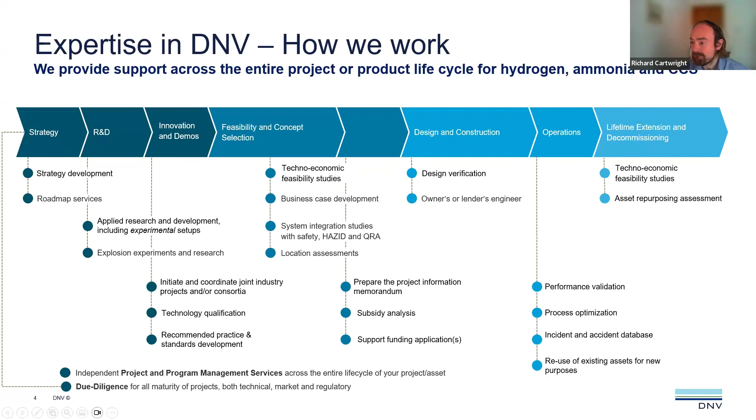So we've used the expertise that we've got in our team and also in DNV as a wider entity to develop, over 6 months during 2023, a guidance document for green hydrogen production. This was done on behalf of and in collaboration with the Energy Institute's Power Systems Committee. The main aim of the document is designed to give clear and practical guidance to industry on the key aspects of green hydrogen production, and it should be available from April this year.

The study includes quite a few things, and we'll focus on a few of them in more detail during the course of the discussion today. It includes design considerations, electrolyzer types, operation and maintenance considerations, and things surrounding co-location - so that's either locating it with a renewable power source or with a hydrogen consumer. The document also discusses the regulatory landscape for green hydrogen and how government support is developing for the industry as a whole. With that, I'll pass on to Gwen to discuss current definitions for green hydrogen.

Yeah, okay. So green hydrogen definitions - green hydrogen broadly refers to hydrogen produced from renewable energy sources, and it represents a rapidly expanding market. This brings a diversity of technologies and ultimately a greater divergence into what can be considered green. So it's therefore important to establish common principles around low carbon hydrogen to provide greater confidence and transparency. I'll first run through some of these key definitions.

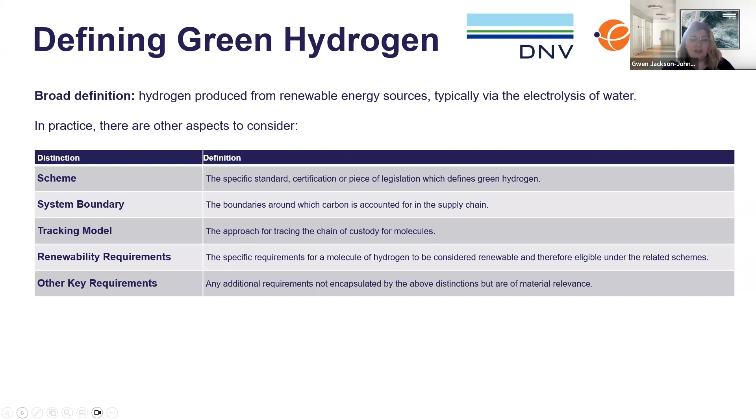And lastly, the renewability requirements. These are used to determine the credentials of green hydrogen. Most schemes consider the renewability of electricity generated prior to the hydrogen production, and some require geographical or temporal correlation of the electricity generation relative to the produced hydrogen. Some schemes also consider whether the electricity consumed in the hydrogen production process is believed to be additional - this is called additionality, and it loosely refers to the principle that green hydrogen is produced using new renewable energy capacity, although there are variations between schemes. There are other requirements too, not encapsulated in the distinctions above, which might include the encouragement of wider social benefits and other considerations such as water use and land use.

Okay, next slide, please.

So in RED II, the requirements are either direct connection to the renewable power with an additionality requirement - this additionality requirement is that the renewable electricity plant must have been put into operation no earlier than 36 months before the electrolyzer. Or, if it's grid connected, there are two approaches. The first is that the electrolyzer must be in a bidding zone with 90% renewables in the previous year, which essentially ensures that the electrolyzer is drawing power from the green grid. The other approach is that additionality, temporal and geographical correlations are required - meaning, as mentioned, the renewable electricity plant must have been put into operation no earlier than 36 months before the electrolyzer.

To meet the temporal correlation, the generation should take place within the same month. However, from 2030, the idea would be that this would move to hydrogen being generated within the same hour as the renewable electricity. To meet the geographical requirements, the renewable electricity plant and the electrolyser must be located in the same or an adjacent bidding zone. The bidding zone is the largest geographical area within which market participants can exchange energy without capacity allocation.

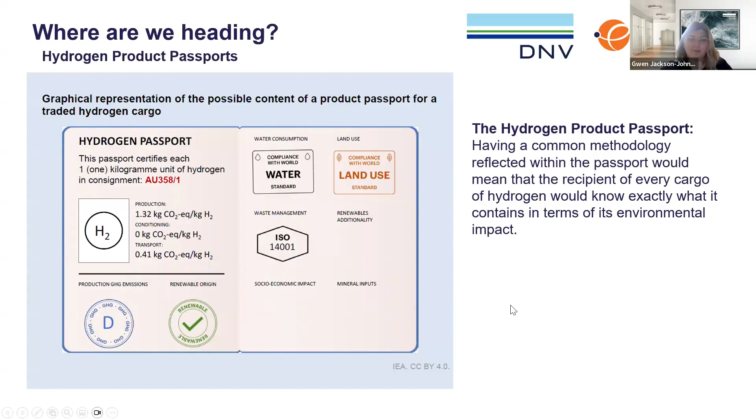Back over to me. So Gwen has defined green hydrogen, but how do we actually produce it? The first means to discuss is biomass gasification. It's a very well understood, mature process now, albeit complex, but it's essentially the thermochemical breakdown of carbonaceous materials into syngas, which is carbon monoxide, carbon dioxide, and hydrogen predominantly.

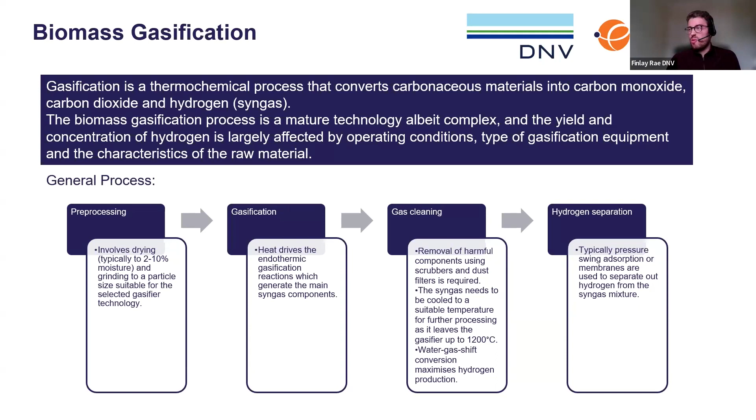It's a four-part process, generally speaking. Pre-processing involves drying the biomass and macerating it down to the right particle size. Then we have gasification, where we use lots of heat to drive endothermic reactions that release the gas. We then clean that gas up, give it a good scrub, and separate the hydrogen out using pressure swing adsorption, also known as PSA, or membrane technology.

One other means, which is a bit more in vogue at the moment, especially in the UK, if you've been listening to anything on the hydrogen allocation rounds or the global scaling up of hydrogen production for energy transition, is water electrolysis. Simple process, really: take electricity, split water into hydrogen and oxygen. There are predominantly four chemical reaction pathways available for conducting water electrolysis.

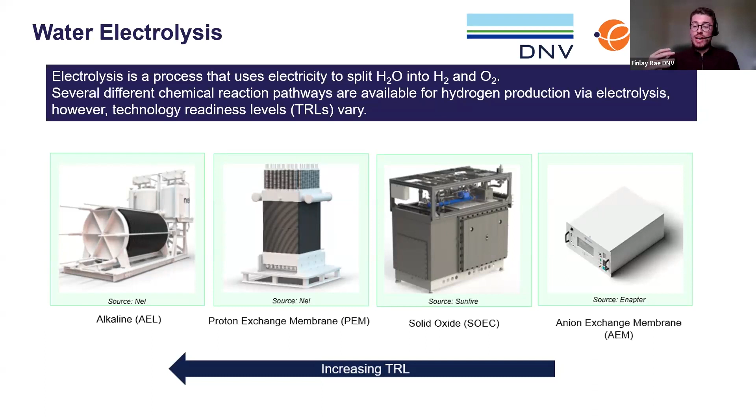Going from least technically mature to the highest, we have anion exchange membranes (AEM), solid oxide (SOEC), proton exchange membranes (PEM), and alkaline. For the rest of this presentation, we'll predominantly focus on alkaline and PEM, given that they are the most commercially mature and have commercial operations in practice right now.

It's a mature technology, with pilot plants already in operation at around 20 to 30 megawatts around the globe. It's a compact system, which particularly lends itself well if you're considering a site with footprint constraints. And crucially, it has high dynamic capabilities. Why is that important? Well, it essentially means it can cope well with ramping up and down with variable loads, going from 0 to 50%, or 50 to 100%, very quickly with a fast response. With all the renewable energy sources that are going to be built out over the next 30 years, this is something it can hopefully tap into.

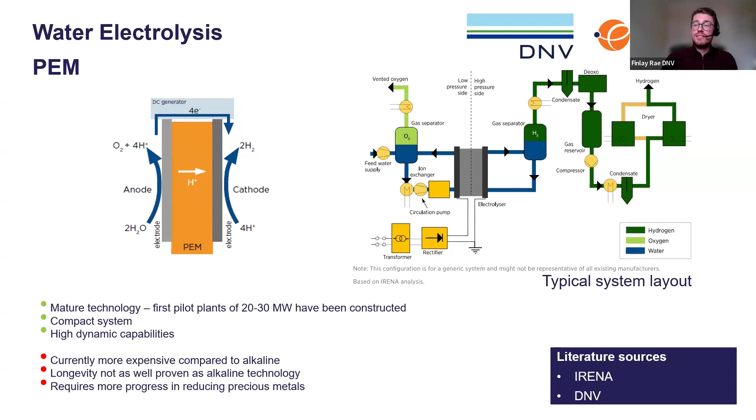Some cons: it's currently more expensive compared to alkaline - I think 20 to 30% capex upfront is usually a good ballpark number. Longevity isn't as well proven; there aren't as many units in operation for us to take data from to adequately assess cell stack life. And it uses a lot of platinum and other precious metals.

So then to finish with alkaline, we won't go into much chemistry, but what I will say is that it uses a water electrolyte solution, predominantly potassium hydroxide. Instead of a positive hydrogen ion traveling through, in this case it's a negative hydroxide ion that travels through the diaphragm and forms water and oxygen at the anode. In terms of pros and cons, it's the most developed, with a global track record as it stands, and it's used across a good variety of industry and end sector uses.

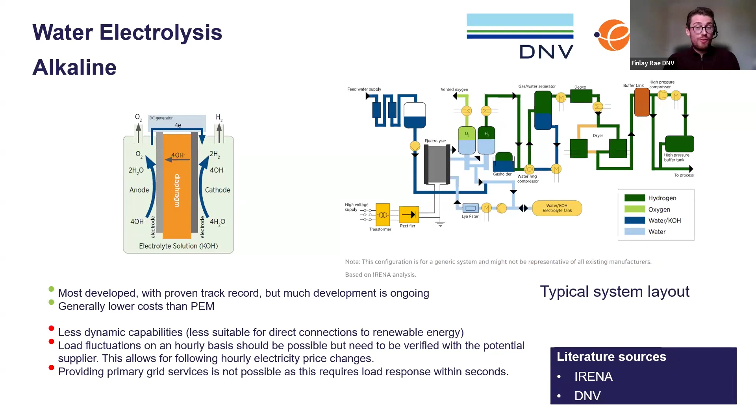Okay, so I'm going to run through some design considerations here. Next slide, please, Finlay. So the electrolyzer design needs to consider 3 main aspects: efficiency, durability, and cost.

These aspects are related to each other, however improving one can lead to a detrimental effect on the other. For example, a thinner membrane results in improved efficiency, but durability decreases. A thicker membrane is mechanically stronger and leads to longer lifetime profiles, but it also increases the resistance to transport of charges, which in turn decreases the efficiency. So while the longer lifetime results in lower cost contribution of the investment component, the lower efficiency results in higher operating cost, given the higher electricity consumption.

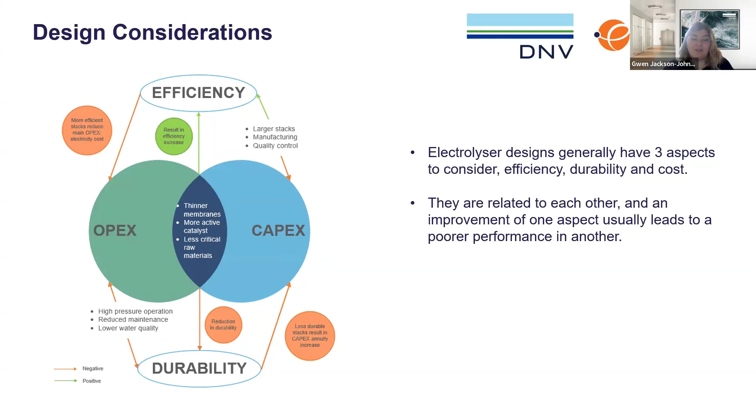Next page, please. These are the main topics covered in the report. I'm just going to expand on each of them in the next couple of slides.

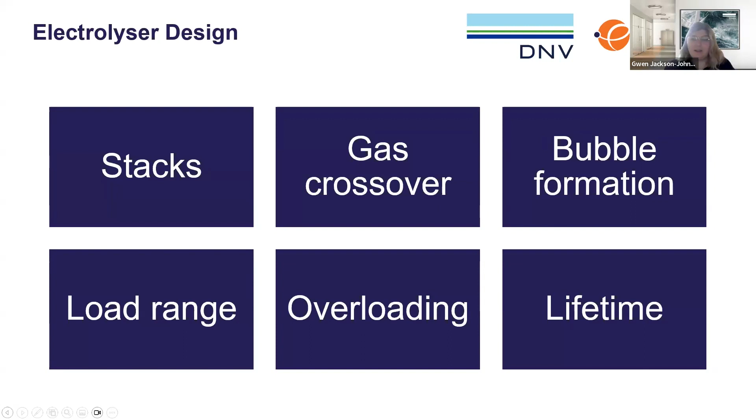A stack comprises of multiple cells, and a large plate is placed at each end to apply a current and compress the stack to ensure it's sealed. The level of compression used for the stack is key to ensure that the seals between the plates are reliable.

The membrane or diaphragm separates the hydrogen and oxygen. However, gas crossover can occur via diffusion in both PEM and alkaline systems, or via advection in alkaline systems. Advection is when the liquid sloshes back and forth through the separator. The gas crossover is the contamination of the hydrogen gas side with oxygen, or vice versa. There's a balance between the maximum allowable gas crossover and the minimum separator required. So as I mentioned, a thinner separator allows for higher efficiency, but it risks a higher gas crossover rate.

When bubbles form on the surface of electrodes, their efficiency decreases as the surface area is reduced. This can cause fluctuations in current density and the rate of reaction. The bubbles tend to accumulate on the most active sites, and are typically removed with large volumes of water.

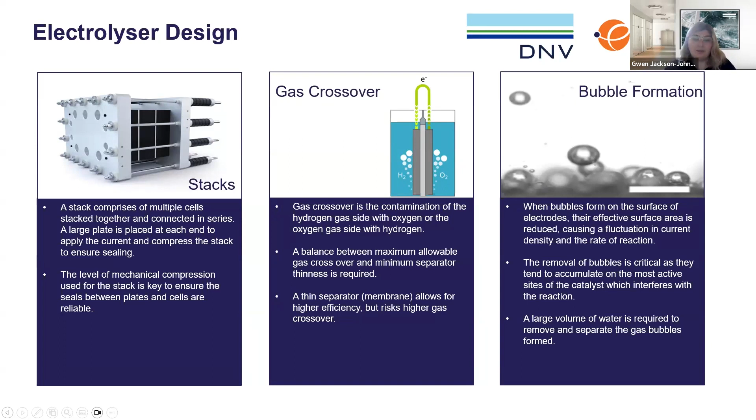Next slide, please. A wide load range is desirable for electrolyzers, given seasonal and daily variability, as Finlay mentioned already. Changes to loads impact the electrolyzer temperature and pressure conditions, and if you operate outside of these conditions, it'll ultimately impact the efficiency. So electrolyzers with a greater tolerance are more suited to power-to-hydrogen systems.

The real world impact of variable renewable electricity is not really understood, as there's no data from OEMs available at the moment due to the lack of commercial electrolyzers. But in general, there are a few ways intermittency can be handled, such as introducing batteries or combining renewable energy types to ensure a smoother profile of renewable source.

Overloading means running the electrolyzer at a higher current density than the rated capacity, typically up to 120% of the rated power. Currently only PEM electrolyzers can operate under these conditions for short periods of time. However, OEMs are looking to improve this for alkaline to be able to go up to 300%. The full impact on the electrolyzer is unclear, although it's likely it will impact efficiency due to the additional stress on the materials.

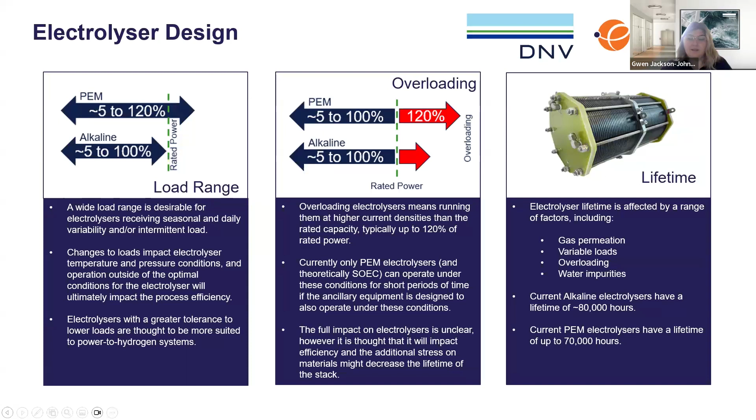Next slide, please. And back to Finlay. Yeah, so implementing safe practices. Now, safety, especially around hydrogen production, storage, transport, and end use, is its own webinar and seminar in itself, so I'm just going to give some high level considerations over the next 3 slides.

So we've split it into plant level and electrolyzer component level. Some examples at plant level: hydrogen releases from pipework, release of potassium hydroxide if it was an alkaline electrolyzer, electrolyzer waste streams of dissolved gases. We've got a more detailed example coming up on that, and the oxygen stream outlet.

And for the electrolyzer component level, we have H2-O2 gas crossover. Gwen's already described that. And electrical discharge.

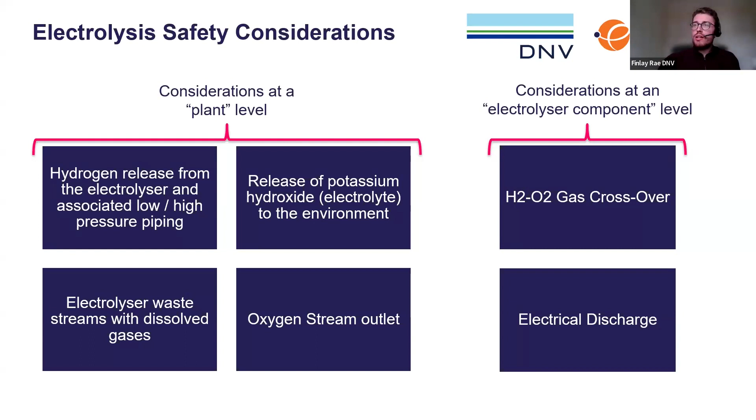So some more flavour on the waste streams of dissolved gases. Electrolyzers can generate aqueous waste streams, and these often have hydrogen and oxygen dissolved in them. These waste streams include water condensed and periodically drained from wet waste gas vent systems, water periodically drained from product gas dryers, and water or electrolyte drained from systems during maintenance.

So naturally, as these streams leave the systems, what we want to watch out for is these dissolved gases evaporating from the solution, and to make sure that if they do, especially into an enclosed space, that it's well ventilated to ensure adequate dilution, to keep it below the LFL of hydrogen, which is around 4%, I think.

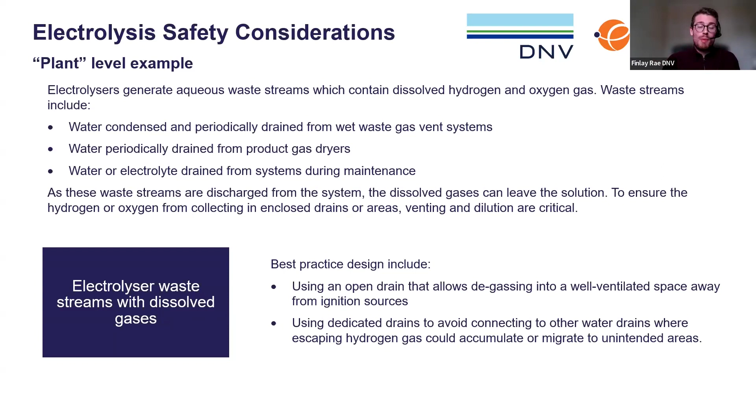Best practices around this: using an open drain that allows degassing into a well ventilated space away from any ignition sources, and using dedicated drains to avoid connecting to other water drains where escaping hydrogen could accumulate or migrate to any unintended areas. And an example then on H2-O2 gas crossover.

Gwen lightly touched on it, but essentially gas crossover is when either oxygen or hydrogen remains dissolved in an alkaline electrolyzer, dissolved in the electrolyte, and it forms at the wrong electrode. It could present an explosion risk, especially when we take into account hydrogen's very low flammability and ignition limits. However, it does typically occur at a very low concentration, typically parts per million or lower. However, during transitional process conditions, it can accumulate much faster.

For example, during startup or as cell stack pressure creates an imbalance. But currently in industry, there's already some pretty good barriers in place to prevent this. In commercial operation, crossover is typically limited to 1.8 to 2% hydrogen at the oxygen side, above which it's detected and an automatic shutdown occurs.

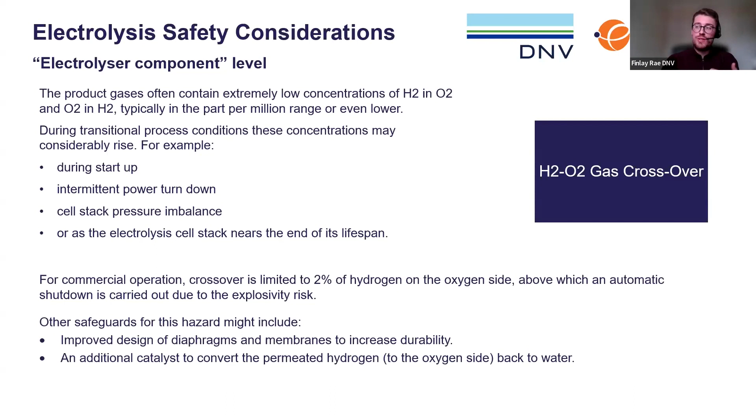Other safeguards might include improved design of diaphragms and membranes to increase their durability, and an additional catalyst to convert the permeated hydrogen back to water on the oxygen side. Back to you, Gwen. Thank you. Next slide, please.

So I'm going to be discussing a bit about operating models, looking at how external influences can impact on the model's effectiveness. Here we'll start looking at the operating states of an electrolyzer, as these are directly impacted by the operating model. The electrolyzer operation is not instantaneous, and therefore an electrolyzer operates under different states: production, standby, and idle.

In production state, the efficiency is near constant. However, degradation of the stack causes the efficiency to decrease over time. Stacks need to be replaced when the efficiency value falls below 90% of its initial value, and this may occur several times over the course of the plant life.

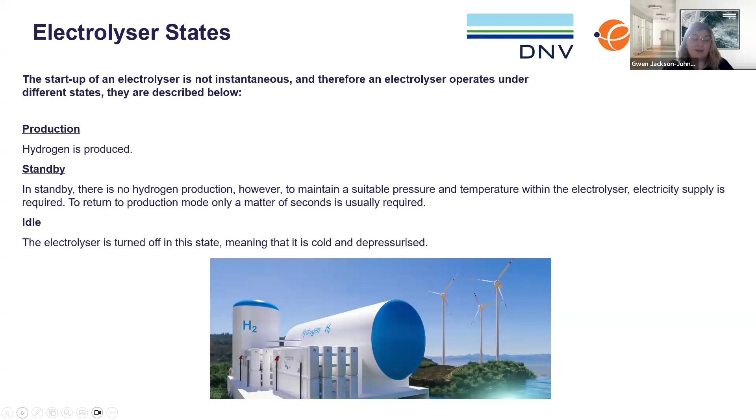In standby, there is no hydrogen production. However, to maintain suitable pressure and temperature, electricity supply is required. The last one is idle state, where the electrolyzer is cold and depressurized, essentially turned off. Next slide. So during the operation of an electrolyzer, transitioning between different states is required.

If we look at transition 1, standby to production, this is also known as a hot start, typically taking place within a few seconds. For PEM electrolyzers, it takes around 5 seconds, and for alkaline, it's slightly slower, taking up to 30 seconds.

Transition 2 is a cold start, going from idle to production state. These are typically advised against by manufacturers, with up to 5,000 cold starts during a system's lifetime recommended, and no more than that. It typically takes 5 to 20 minutes to go from idle to production state.

Transitions 3 and 4 are production to standby and production to idle, and these are considered instantaneous. Transition 5 is idle to standby and standby to idle, and this is not recommended - only transition from production to idle and vice versa.

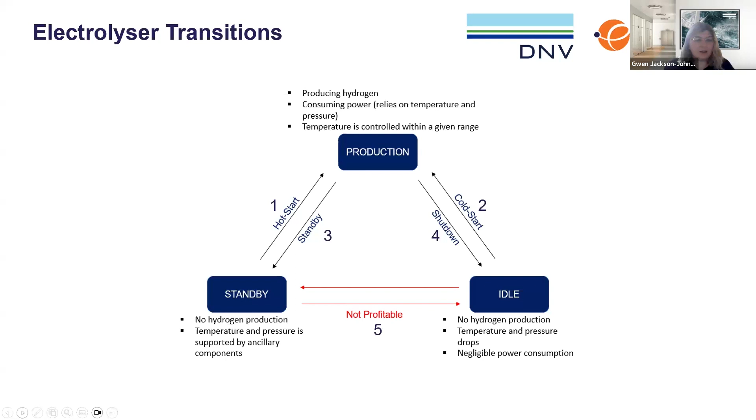So moving on to some examples then. The report discusses 4 different models. 2 of them prioritize hydrogen production, and the other 2 focus more on the use of variable renewable energy, using hydrogen electrolysis as a means for flexible generation.

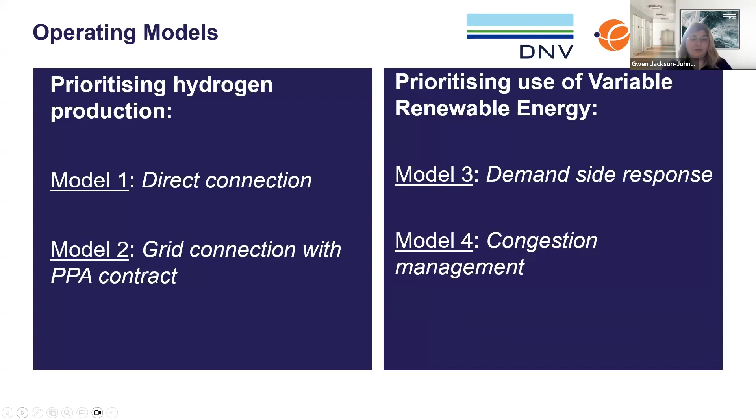So the first one is a direct connection to an electrolyzer from renewable energy. This model is directly connected, and due to the nature of the renewable energy, there are variations in the energy supply that the technology receives.

So this would require an electrolyzer capable of handling these sorts of power variations, so this would currently be pressurized alkaline or PEM electrolyzers. Without a battery or a generator, the system would only be capable of cold starts, and these aren't typically advised. So there's a balance between the cost of a battery and the extent of degradation the electrolyzer will encounter from cold starts. These things need to be weighed up.

This model also requires the connected systems to respond to load changes at the same rate. In addition, in times of low generation, the connected systems should also be capable of operating at a lower power.

When you're considering larger scales, like for example feeding the hydrogen produced into a hydrogen network, the variation in hydrogen supply is less problematic. Larger wind farms will have more inertia, and as a result, less fluctuations compared to smaller scale.

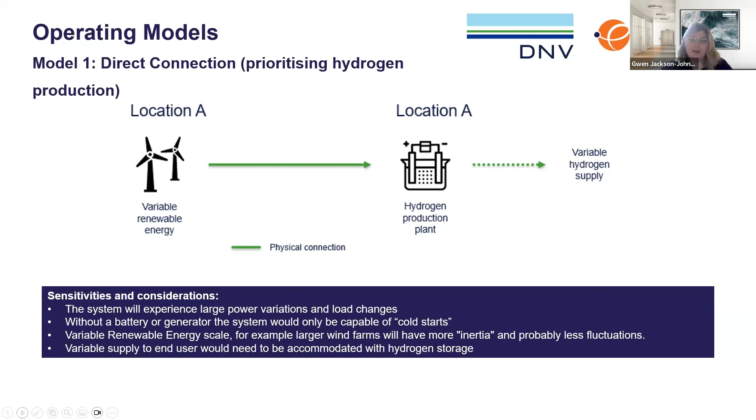This model kind of assumes a power purchase agreement. A power purchase agreement is a contract between energy buyers and sellers, and the power associated with a PPA is transferred through a power grid as any other power would be, providing a steady electricity supply. PPAs allow green hydrogen producers to engage in contracts with renewable energy producers to ensure that hydrogen production will incur constant and forecastable costs compared to variable renewable energy costs.

This model is likely to suit on-demand consumers, such as hydrogen refueling stations. A steady electricity supply means there's less restriction on the chosen electrolyzer type, as there's no restriction on the operating range, and hot starts are enabled with a grid connection, which is critical if you're wanting to meet variable demand.

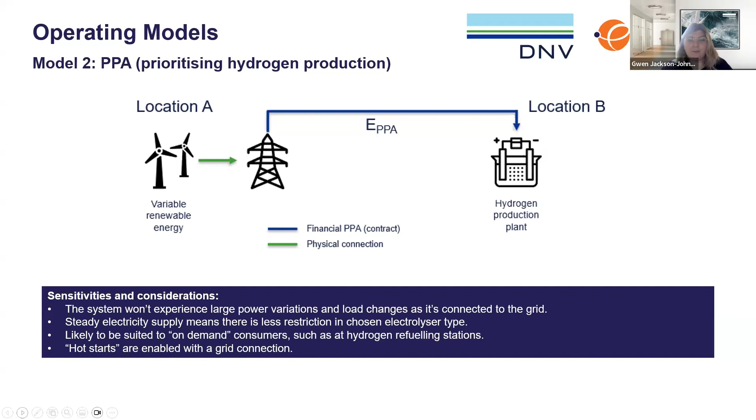So the third model looks at demand-side response. Renewable energy is prioritized here for the electricity grid rather than hydrogen production, and only surplus renewable energy is supplied to the hydrogen production plant, so that hydrogen is only produced where renewable energy would otherwise be curtailed. This model would require an electrolyzer to handle variations in power input, and both pressurized alkaline and PEM should be able to handle this sort of varying load.

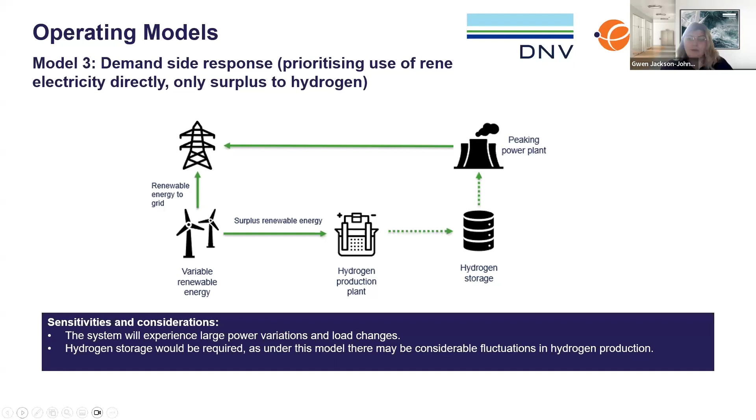And the last one is looking at congestion management. During critical peak loads of the electricity grid, large-scale electrolyzers can support this by reducing their electricity demand or potentially ceasing operation completely. There must be economic incentive for this. Additionally, the practicalities of the end user for hydrogen need to be considered. The flexibility of hydrogen production operation in this case would be based on the capacity of hydrogen storage, for example. This model is quite similar to the one just mentioned, in that an electrolyzer would need to be able to handle variations in the power input.

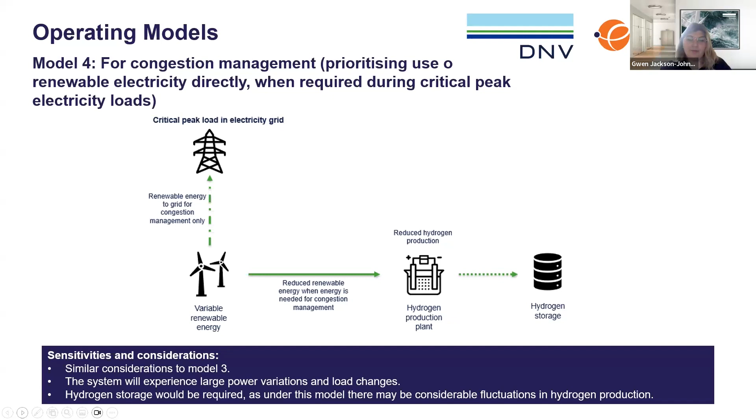So I guess to round things off, I have a quick few slides now on co-location, which essentially takes what Gwen's been talking about and maps how the different sections of the hydrogen value chain connect, with some considerations we can make along the way. During our report, we put it into 4 buckets: upstream, midstream, downstream, and hybrid. Not to be confused with the oil and gas segments, this is related to hydrogen production with renewables.

So if we take upstream, for example, we could co-locate the renewable energy source and the hydrogen production together. For example, this could be an offshore wind farm and an offshore hydrogen production platform, or it could be offshore wind turbines with individual electrolyzers on the turbines themselves.

We then have midstream, which would be when we co-locate the production and the storage together. For example, we could have offshore wind power landing ashore, having hydrogen production, on-site storage, and then the end users elsewhere, so we'd have to transport it to the end user.

Then we have downstream, which would be if we had the production, storage if needed, and the hydrogen end user all together. So for example, in that case, you'd have offshore wind landing to onshore hydrogen production, storage and end user in the same place.

And then we can have hybrid, which could be a mixture of all 4. So it could be onshore wind, onshore hydrogen production, storage if needed, and the end user.

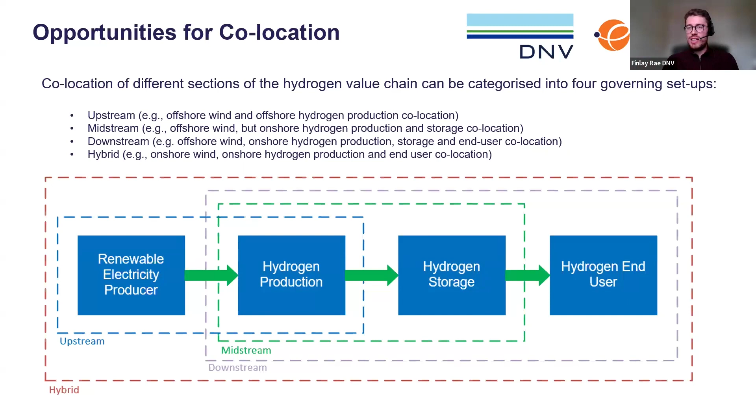To go into one in more detail and give some further considerations, we'll take upstream co-location. So here in the diagram above, we have electricity generation - let's say it's an offshore wind turbine. That's going to be producing AC power, so we need to convert it into DC before we can feed it into the electrolyzer. We then have...